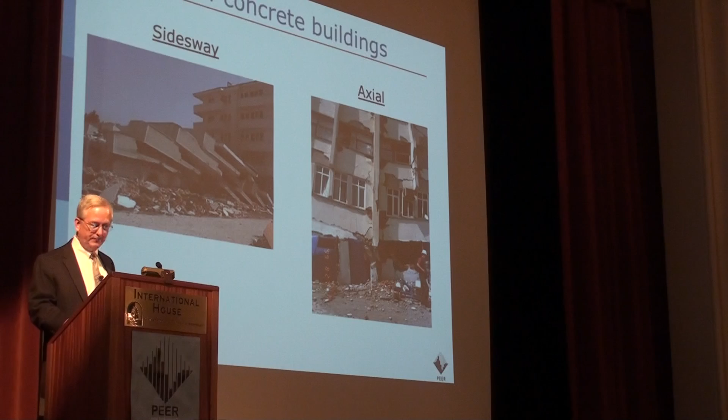We were very interested in understanding these behaviors. Twenty years ago, we didn't have a very good idea about how these things work. We're still working a little on it, but we've learned a lot in the intervening time.

We came to know that in columns of certain aspect ratios and reinforcement quantities, the failure was quite complicated, and there were interactions among many different behavior modes. For example, if flexural yielding started at one point in the testing of a column, that would trigger changes within the column section that would reduce shear strength and precipitate a shear failure at some point further along.

As the shear strength degraded, the appearance was that as strength degraded down essentially to zero, an axial failure could be triggered. This was an early observation with a few tests, and these kinds of things were pursued through the development of some shear friction models, and there's been a variety of these kinds of things developed over time.

This very simple shear friction model is wonderful in the sense that it says the axial strength is essentially directly proportional to the shear strength provided by the transverse steel. We'll see that in a moment.

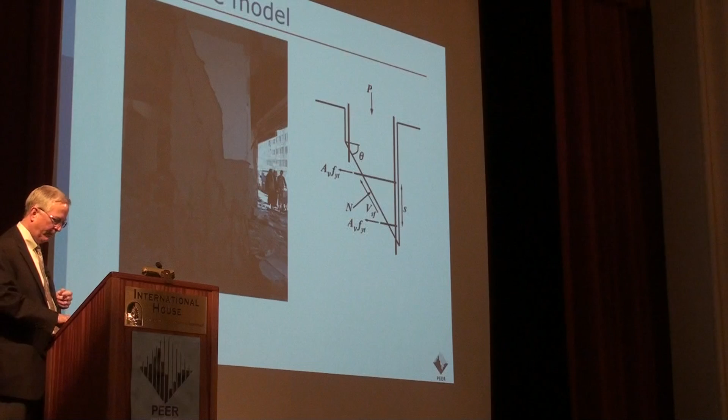This was developed based on very few tests 20 years ago, and of course we needed to do more testing. So there were many tests carried out under the auspices of Peer. Some were done at Berkeley, some at UCLA. There were eventually column tests carried out at Purdue University and the University of Minnesota as part of the NEES program. We had a very strong collaboration with researchers in Japan and Taiwan, and many other tests were carried out in those countries. But Peer really got that whole program going in those countries as well.

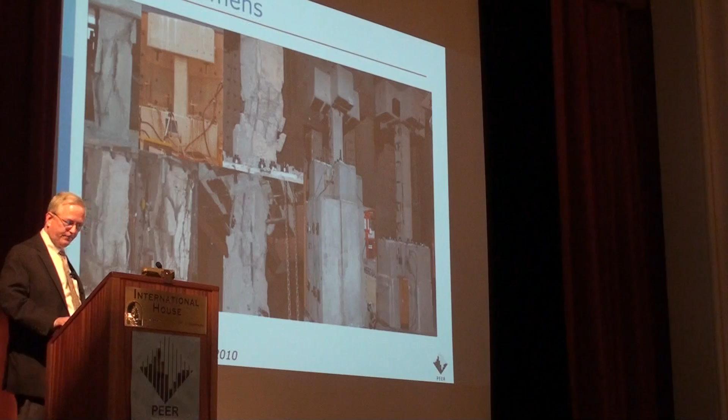We had to ask the question, how does biaxial loading affect the answer? It does, as one would expect. There's a more rapid degradation in axial force carrying capacity under bidirectional loading. These kinds of ideas have been adopted into ASCE 41 and elsewhere and are in widespread use today.

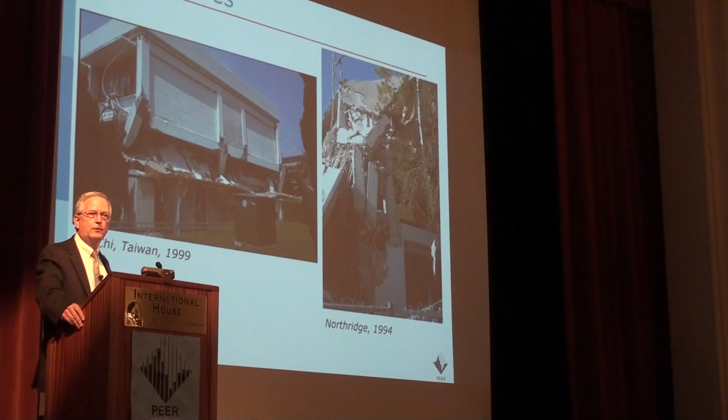We also had questions about the behavior of beam column joints. Can beam column failures trigger the failure of a building? Of course they can. If, as in the left figure, the shear strength of the joints is lost, the columns lose their moment carrying strength. You can't transfer moment through a joint that has no concrete left. So joint failure transforms a strong column frame into a weak column frame, and a weak column frame can develop a mechanism and fail, as shown on the right. There's also the question whether the failure of a joint itself can trigger axial failure without the step of having a soft story.

This was a question of great interest as we embarked on our studies within Peer as the research results developed. There were tests on beam column joints done at University of Utah—Chris Pantelides is here. Others were done at University of Washington, and then there were also some tests at Berkeley.

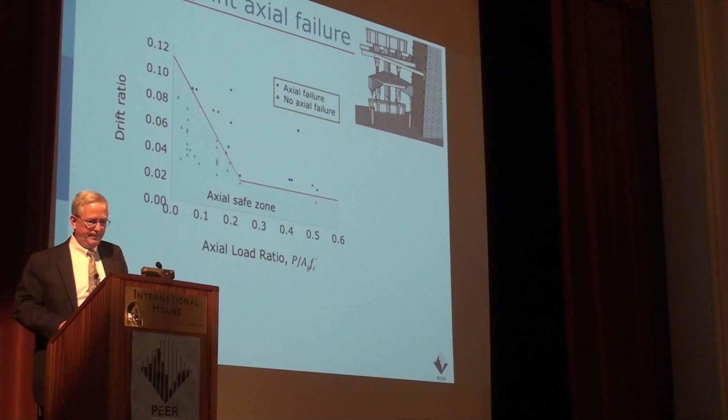Then there's an area with high axial force and high drift for which axial failure seems certainly a triggering phenomenon. Now, all of these things that were done within Peer were always done with the purpose of developing an analytical model. It's okay to test something, but only if you develop models for use in practice, only if you develop simulation capabilities that can be used to extend the results.

That was always a part of all the work that we did in the non-ductile concrete building domain. Wassim Ghannoum, who is here from UT Austin, was one of our graduate students at the time. He went on to UT Austin and developed some models. Curt Haselton, Greg Deierlein, Ken Elwood, and others developed other models for the behavior of columns.

Now, the purpose for developing these things was so that we could understand better how buildings would respond. To really develop that understanding, we also in PEER carried out a series of shaking table tests. One example was a series of two-column frames. There were a dozen of those. And then we did the other case that had a dozen columns but only one frame.

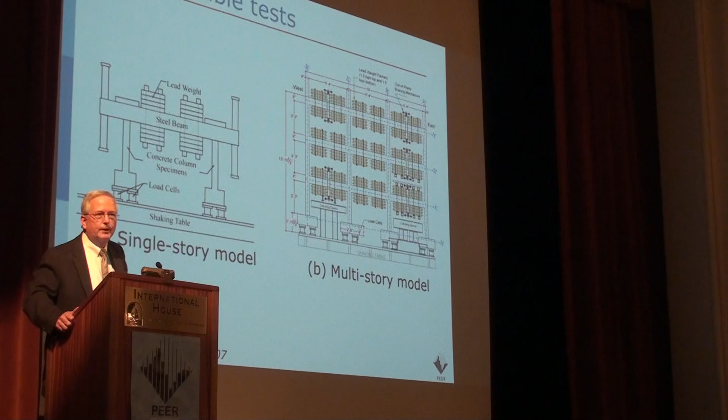To understand some of the dynamics, there were other tests run at NCRE looking at multiple columns. We're looking at beam-column joints that failed. This allowed us means for testing the analytical models that were developed. Here's an example of a test in a simple two-column frame that sustains shear and axial failure. Can we model that? Can we identify when those things occur?

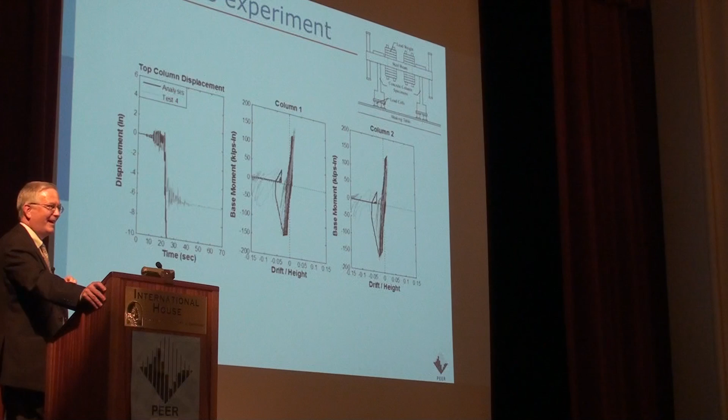And we gained confidence as we worked with these models that we were able to predict certain things, not everything. Once axial failure gets triggered, it's very hard to follow through in these very lightly reinforced cases. But having some experience enabled us to extend ideas out further.

Abby Leal, Curt Haselton were graduate students in PEER at the time, working with Greg Deierlein. One of the very interesting studies was to look at the relative safety of older concrete buildings versus, at the time, newer concrete buildings. We can see here the predominant yielding mechanisms that developed, and then in this case, the different fragility relations for newer buildings and older buildings.

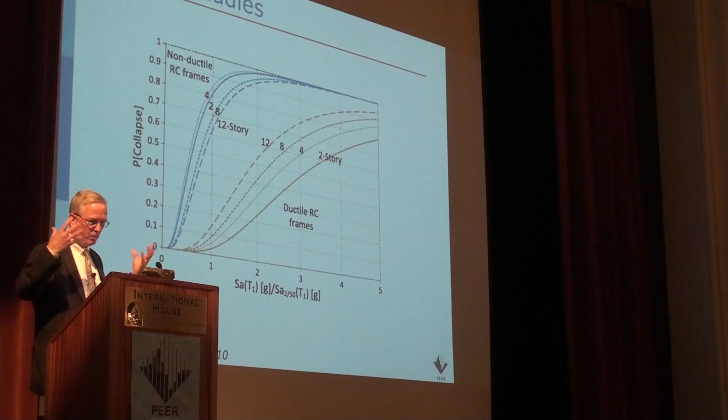A simple observation from these is that there are cases where the older buildings are something like 10, 20 times more risky than the new buildings. These studies were very important for understanding, for quantifying the risk at hand.

Additional studies have been carried out to look at how details of the frames affect that calculated risk. This is an example where on one axis we've got the relative column-to-beam strength ratio, and on the other axis is how strong the frame is relative to the elastic demand. This is a case where it's a flexure-critical column, and what's plotted here is the probability of collapse as a function of these parameters.

As we move more toward shear-critical columns, the fragility goes up and up and up. This beautiful colored balloon-like thing is not only beautiful and colorful, but it tells us something about the parameters that most indicate a risky building, and it's these kinds of things that can be used in the future.

Laura asked, what are the future needs? Some of the future needs are to take the models and do more work to understand better what the most risky combinations are, what building types are the most hazardous, and how we can develop better hazard models going forward. We heard the need for this morning.

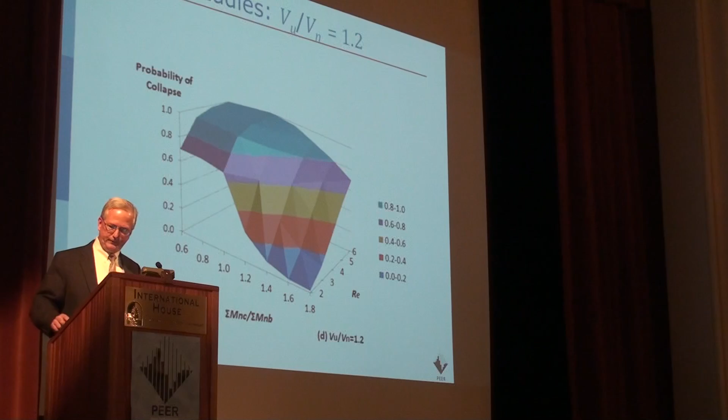In PEER, we also—somebody turned me on. Oh, turned me back on, okay. That was 50 minutes.

We also did a very interesting thing as part of a grand challenge project: we went down to Los Angeles and we counted buildings. And then we did studies of what the projected losses would be.

For better or worse, the LA Times got wind of this. It made me almost like a movie star. It made for me a most dangerous year, wondering when I would get sued. But eventually it resulted in an ordinance being passed. That and other things contributed, came together and helped develop an ordinance for LA that I feel PEER deserves some of the credit for.

And we've also, as a center and as researchers and as graduates, been involved in many different activities that are taking what we've learned in this center and expanding it outward. I think that's a really important part of making a difference with the Earthquake Center.

So then and now, this is the old Holiday Inn building. I don't think we yet could calculate exactly where the failures occur, but it doesn't matter because the new one is retrofitted. And we have some new challenges to deal with there.

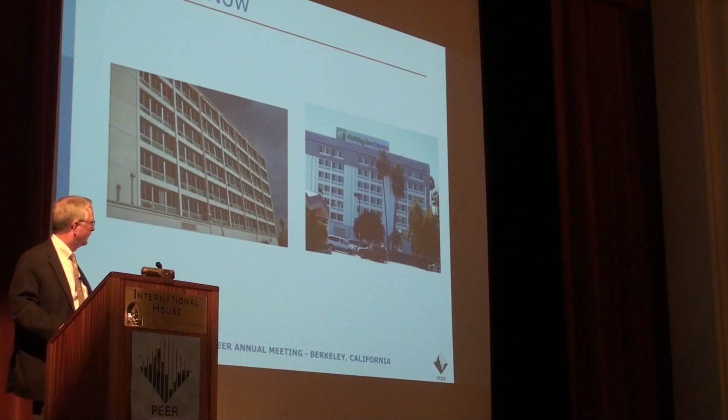Those of you who came into this building, I assume read the signage on the way in. This building is located in a seismically active area—the fault is like 20 yards away from here. In the event of an earthquake, serious injury or property damage may occur.

So this is a concrete building, a type that we haven't studied so much yet, and I think there's plenty of room for continued research in this broader area of reinforced concrete construction. So we can go to places like LA and San Francisco and continue to make a difference in seismic safety for these kinds of buildings. Thank you.

Are there any questions? That looks like no. Oh, okay.

So it occurs to me as you're speaking, do you think that we will get to the point where we can model Van Nuys Holiday Inn its old state before all of those buildings get torn down and rebuilt? So yeah, great question. Will we get to that state? I think there's enough variability in the ground motion, how the ground motion gets into a building, and enough variability in the innards of every building out there that we may never be able to predict exactly what happened.

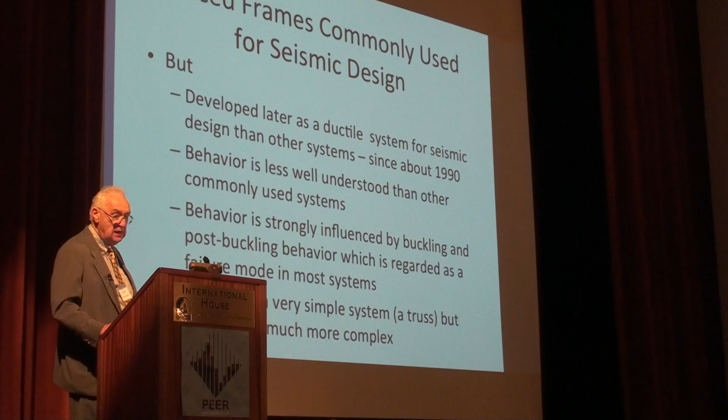Unfortunately, many structural engineers don't really understand what they're expecting the structural system to do seismically, and this has caused real problems. As a consequence, there has been fairly significant research on brace frames in the last 10 to 15 years that I think hopefully is trying to help better understand the performance of brace frames, improve the seismic design of brace frames, to better understand the performance of brace frames we built before any consideration of seismic design, and to do a retrofit of this. That's pretty much what I'm going to try to talk about today.

The work I'm going to focus on today has primarily been 3 National Science Foundation projects that have been performed since, I guess, 2003, continuing on to today. The research on these projects has been done at 4 major institutions.

In the upper left, you see our lab at the University of Washington in Seattle, and we've tested more than 50 single-story, single-bay brace frames in our laboratory, with different braces and a wide range of different connections, to evaluate their seismic performance.

On the upper right, you'll see the MAST laboratory in Minnesota. In this laboratory, 2-story brace frames were tested, and these were 3-dimensional type frames, tested under bidirectional type loading at that university. These simulated, more accurately, the boundary conditions for brace frames.

On the bottom left, you will see a frame at the NCREE laboratory in Taiwan. This laboratory has tested 8 multi-story, 2- or 3-story brace frames with concrete slabs under a range of different seismic applications with different types of braces. And on the bottom right, you see some 2-story frames that were tested here at the laboratory at Berkeley.

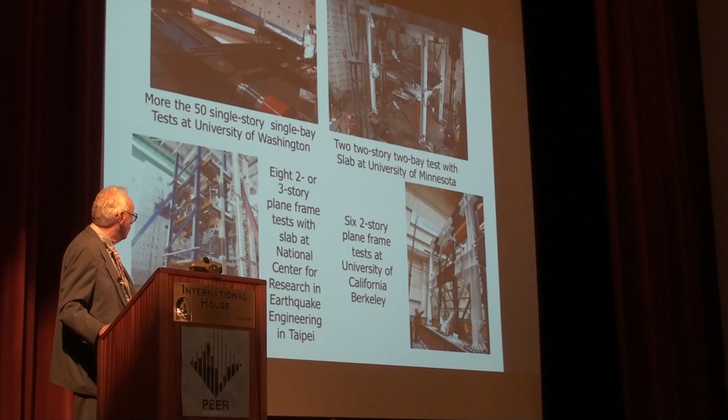There were several other research projects on brace frames in the last 12 years, including some research done at the University of Buffalo, Georgia Tech University, and the Miki Test Laboratory in Japan. My focus is going to be the results of these works.

Now, I've made presentations of these. We made one presentation a few years ago that was over 4 hours. I don't think you want to sit here for 4 hours today. I'm told you could have 15 minutes.

So rather than going through a lot of talk about what the researchers are doing, I'm going to try to focus on key results that I think are significant, and things that I think are significant achievements from this particular work.

First, I think the key thing we really need to think about is that when people think in terms of brace frames and structural design, they think about designing member by member. If you think about designing a brace frame member by member, you're probably not going to do a very good job. With brace frames, you've got to think much more about the system, because the member acts with the rest of the structure.

You have to think about the brace, how its connection relates to the rest of the framing members. Because in brace frames, buckling is our major consideration, but there's a lot of inelastic deformation in the gusset plate connections that connect the brace to the regular framing, and then the beam columns themselves.

Secondly, I think you have to recognize that inelastic deformation of the brace is a primary inelastic behavior. Buckling is not the end of the world. Buckling is a yield mechanism. It's a way to deform the structure. It dissipates energy. Fracture of the brace is a thing that's ultimately going to occur, but brace fracture does not imply structural fracture. These are two perceptions people have about brace frames that tend to lead them astray in their thinking.

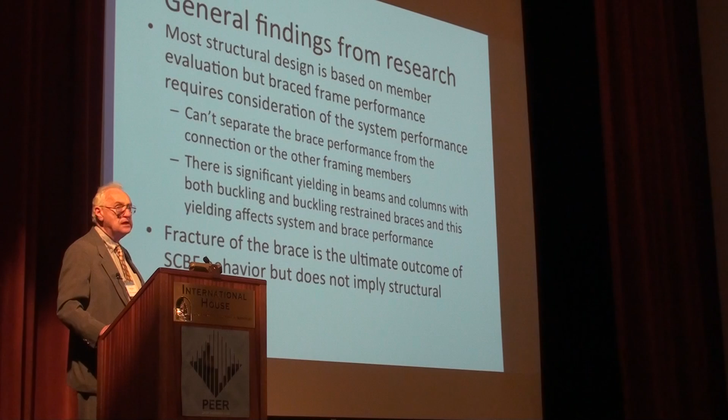So in doing this, we've come up with what we think are some recommendations for new construction, which are quite useful and quite valuable. One decision is that currently, when you design the connections for the expected capacity of the brace, and then when you design the welds joining the gusset plate to the brace, most people use the uniform force method for that expected force.

What I'd like to show you is that this is not going to give you good performance. It's going to result in very, very limited ductility, and it's very likely to end up with weld fractures such as you see right here.

If we're going to be designing brace frame gusset plates to get good inelastic performance, we've got to design the welds joining the gusset plates to the beam and the column to be strong enough to develop the full inelastic deformation capacity of the gusset plate. Because the gusset plate will yield, it will go through inelastic deformation—I don't care how big you make it, that deformation is going to occur. So we've got to design the welds to be big enough to develop that particular gusset plate.

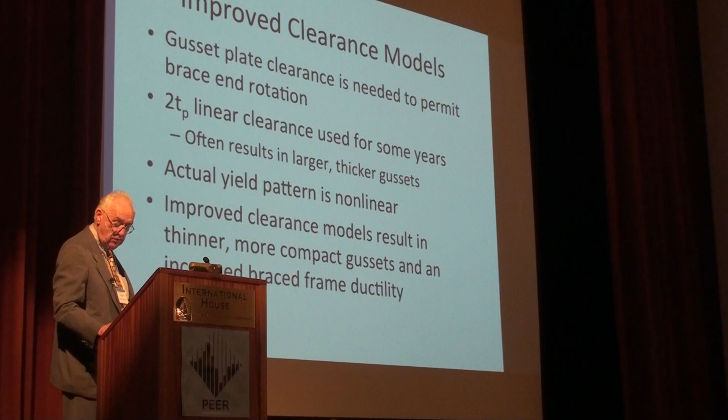Another thing we've developed is the clearance models. In buckling there's a great deal of out-of-plane deformation of the brace, which causes end rotation on the gusset plate, and you've got to consider that. Historically, we've used the 2T sub P linear clearance model. There's nothing wrong with this model, except it does tend to lead to fairly large gusset plates, and these large gusset plates tend to be controlled by buckling because you have to bring the brace back quite severely. So we've proposed some better models that we think are more reflective of the way they actually behave.

For corner gusset plates, we propose an elliptical clearance model as shown on the left, because this reflects the pattern of yielding you typically see in these gusset plates. For mid-span gussets, we propose a 6T sub P linear clearance at that location. We proposed these because they allow you to bring the brace back further, meaning buckling no longer controls the design of the gusset plate. This means you're using a thinner, more deformable gusset plate, which means you can use smaller welds, and it actually increases the inelastic deformation capacity of the system.

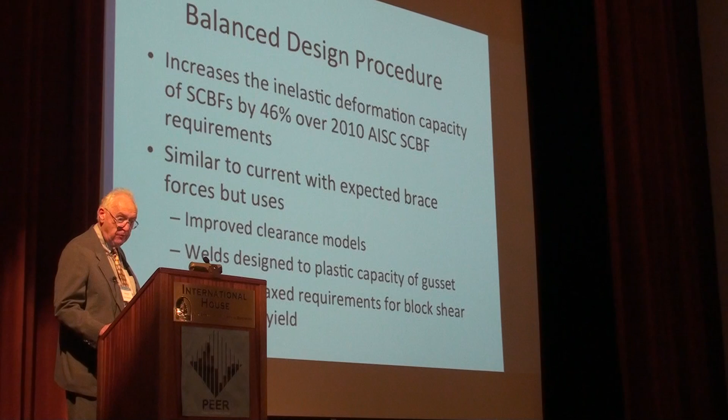We also propose a balanced design procedure for these gusset plates. This is a capacity-based design procedure in much the same way as we normally use. With this procedure, however, we like to use increased yielding in the gusset plate and a relaxed block shear criteria. The reason is, if you have a little bit more yielding in the gusset plate, you get a lot less damage to the beams, columns, and other structural members. We think this improves performance—it actually increases the inelastic deformation capacity of the brace, an average of 46%.

So what we're really proposing today is a sequence of behaviors. We expect the first thing to occur is brace yielding, brace buckling, and brace yielding—buckling typically occurs first. Shortly after that, we expect some yielding in the gusset plate, and ultimately some yielding in the beam or the column. But ultimately, we expect the outcome is going to be brace fracture. Brace fracture does not mean collapse—the frame still has significant inelastic deformation capacity after this.

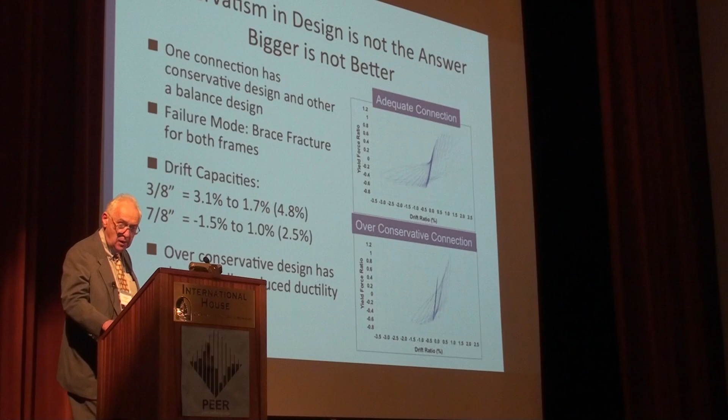More recently, we've been doing research on older pre-1990 brace frames. To start, we looked at an extensive number of design drawings of older buildings, mainly from California, but also from Washington, Oregon, and some other parts of the United States.

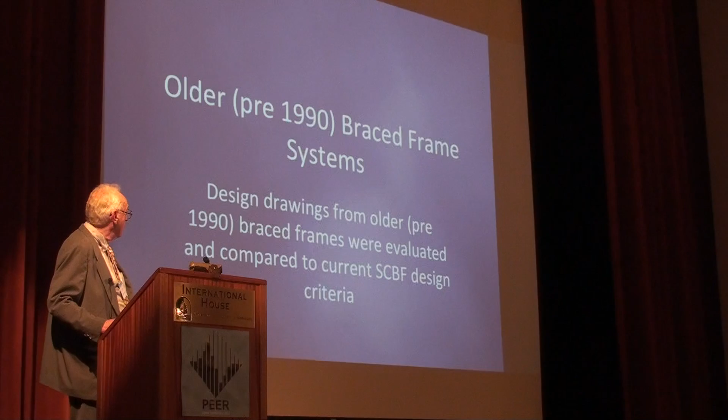In doing this, we see a lot of deficiencies. We have figures of what these look like. I'm not going to focus on all of these—I picked out several deficiencies I'd like to talk about.

One deficiency is that almost all of those older brace frames are chevrons. We don't use chevrons hardly at all today because of the strength requirements in the beams.

We find that many of those have understrength gussets with no end rotation clearance. We find that the welds are deficient—deficient because they are not demand-critical welds, and because the welds themselves are undersized. I think you'll find they commonly use HSS braces, and these HSS braces are very slender compared to today's requirements.

They have a wide range of bolted and welded connections. Many of these we have tested in our research. What I'd like to say about these older brace frames is some of these systems aren't that bad—some are almost as good as what we'll be designing today, maybe better. Some of them are very, very bad, with very serious problems.

Here I think you'll see one that is actually pretty good—it's not bad at all. On the left you'll see an SCBF bolted connection designed by today's criteria. On the right you'll see an older connection, and you'll see that the older connection gets as much, if not more, ductility than we get out of our new system.

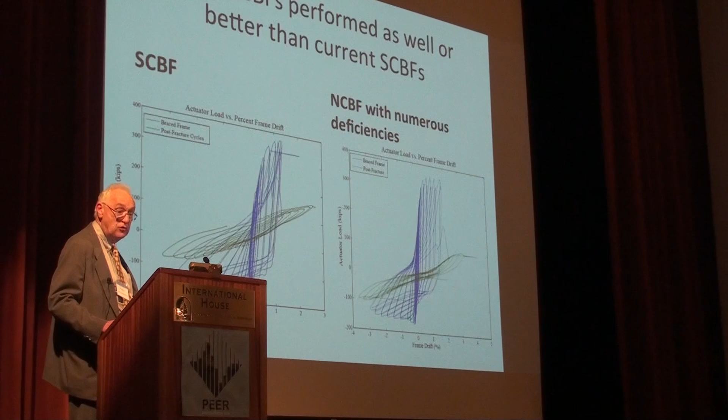Why is this? Well, because the older system had deficient gusset plates, so it was yielding in the gusset plates and getting bolt hole elongation. That bolt hole elongation really contributed a lot of inelastic deformation capacity to the system. Today, we design our bolts very, very conservatively, and you don't get this—so in effect, we were fracturing our brace much earlier in these systems.

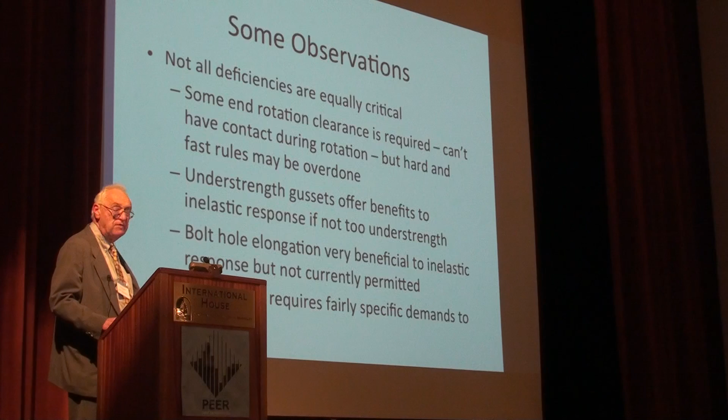As I pointed out, not all deficiencies are equally critical—some seem to have bigger consequences than others. End rotation doesn't seem to be as big a problem. Understrength gusset plates don't seem to be much of a problem either. Bolt hole elongation, which occurs with these weaker gussets, is often a good thing. Net section, we find, is not a real problem in many cases—it requires a very, very special set of conditions to occur.

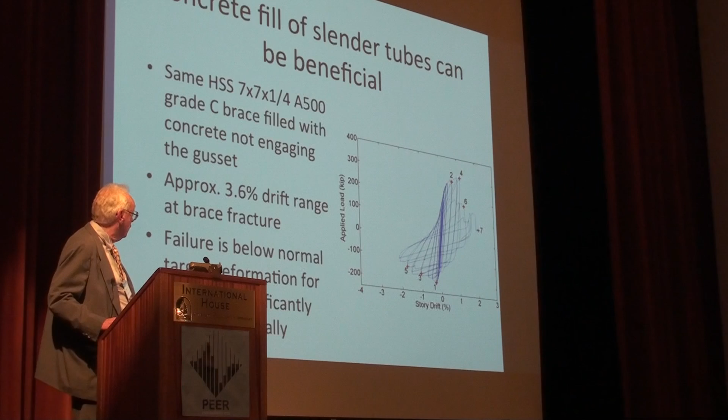We looked at methods for possibly fixing that. One method is to fill the tube up with concrete. We did this, and in this test, I think you'll find that it's done very, very well. However, it's not a perfect situation.

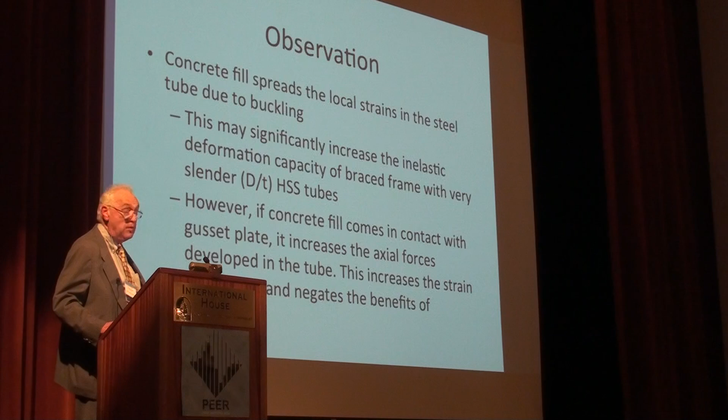Since the concrete fill engaged the connection, it made the brace stronger, attracted larger forces and larger strains, causing the brace to fail more quickly. So we think this concrete-filled tube concept is good for possibly improving the performance of these slender braces, but you really have to keep the concrete well clear of the connection.

Weld fracture is another relatively serious problem. It didn't seem to be quite as serious as we expected, largely because the gusset plates were almost invariably also weak and didn't protect them.

We tried a potential economical retrofit using weld overlays. Weld overlays were tried in the SAC Steel project with not very good success, but we found that weld overlays have actually been fairly beneficial with these gusset plates. We designed the weld overlays with demand-critical welds, and sized them to develop the plastic capacity of the gusset plate.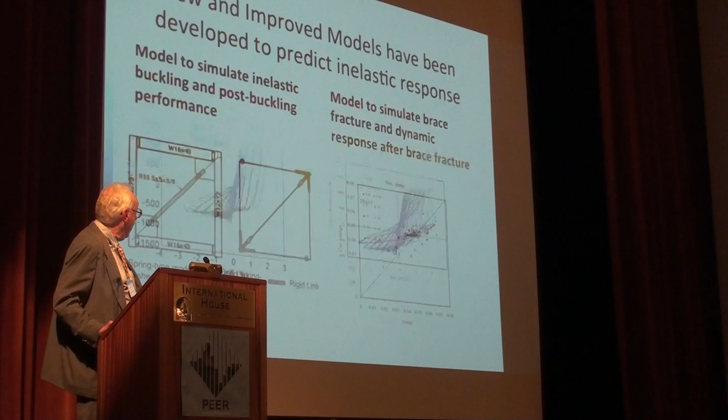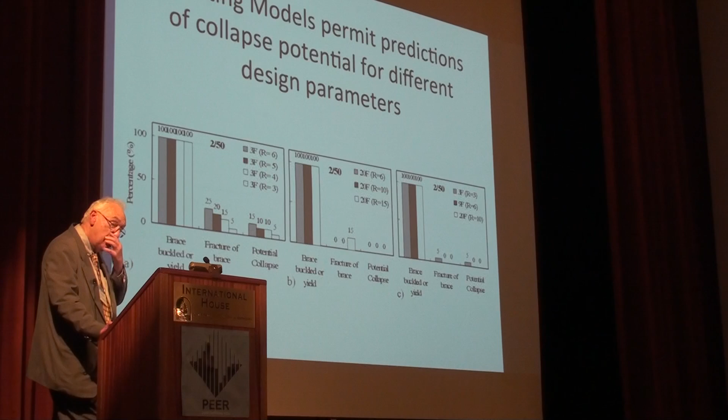We've also done quite a lot of work developing nonlinear models to predict performance, focusing on the connection and on brace fracture. We compared all of these tests with experimental results. Here's a comparison showing the stiffness and the prediction of brace fracture. Using this information, we estimate what we expect the performance of brace frames to be. Here is a comparison of expected behaviors of a brace subject to a 2 and 50% acceleration record, for a 3-story building on the left, a 9-story building in the middle, and a 20-story building on the right. Using information of this type, we think we can make further improvements in brace frame design.

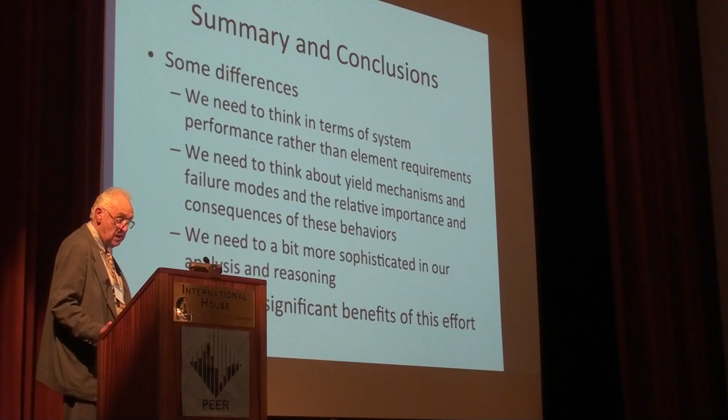So I think there have been some significant developments in brace frame research. I think there are a lot of things we've learned. I think there are ways we can continue to improve the performance. I think there's a considerable way we still have to go. In any case, I think we need to think in terms of system performance, in terms of yield mechanism and failure modes, and we need to be a bit more sophisticated in our thinking about brace frames.

I've talked too long, but this is a photograph of the University of Washington campus, which I always use to tell me it's time to shut up.

Which is very much member related, but I don't think it requires all that much thinking. It's like writing a program where you have do statements and if statements, and you need to think about, well, if I have this, I need to condition my response on two or three things rather than just a single variable. But I think we have to do a better job, or we're not going to get the full benefit of what we can get out of this.

I don't think there's a conflict with what we're saying and capacity-based design. I think it's just a modification of the way you apply capacity-based design. Right now capacity-based design looks at things in a certain way. Our recommendations don't really change that; we're looking at the same basic capacity-based conditions, we just like to apply them differently and think about them differently. I think capacity-based design tends to make you want to be very conservative in everything else, but think about that - you can easily think of cases where it gets taken to extremes. The idea is you pick your mechanism in advance and design everything else to stay elastic to develop that one mechanism. But why does everything else need to be elastic? What seems right to me is you design everything else to be strong enough so it doesn't have problems. Why does it have to be elastic? You just don't want it to have problems, and that's very much what we're trying to do with that type of behavior.

I think you can readily see that, for example, in this building, if you said okay, I want the columns to have no shear problems - which I don't know if they do or not - you could put a ton of shear reinforcement, three or four times as much as you need. Does that help you? It might actually make the situation worse because it may attract forces and cause things you don't expect. So we think you should design it to be good enough, strong enough, but no more.

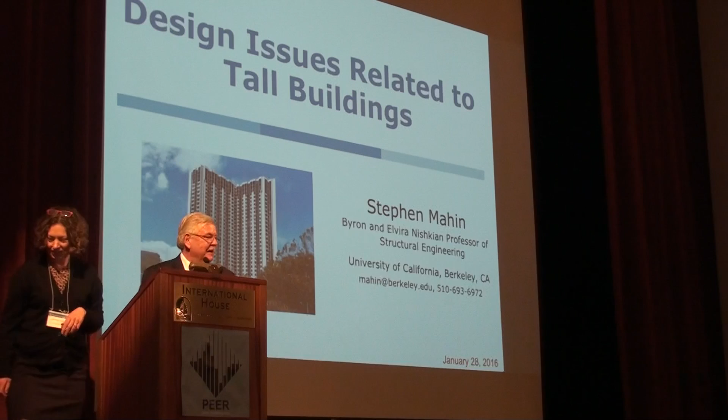Well, anyway, it's good to see you again, and we have a little bit more audience than we did this morning, so that's great to see everyone.

What I thought I'd do today was talk a little bit about tall buildings. I'm not going to talk so much about the research or research results, but this was intended to help us focus on some of the philosophical issues with regard to resilience and the seismic performance we'd like to have in structures, to get some discussions going later in the meeting.

This is related to tall buildings. It's a topic I've been working on for most of my career in one form or another, and I've come back to it in the last 4 or 5 years in some significance.

Part of that reason is that this is a building not in Berkeley, but on the border of Berkeley. I think it was the tallest reinforced concrete moment frame building in the United States in 1984, and I live right there—which suggests that after the next earthquake there may be something like 1,200 angry lawyers and one really upset structural engineering professor. In any event, that was the tallest building, and now in California there are taller buildings.

But if you look around the world, one question is: what constitutes a tall building? You don't have to go very far—people from Shanghai here will recognize this building. So my tall building, which is 30 stories, is 1/3 the size of something that would be a relatively mid-level tall building in much of the rest of the world. So 'tall' is a relative term, and most likely we will get up to these heights at some point. What can we learn from the lower buildings to apply to super tall buildings as well?

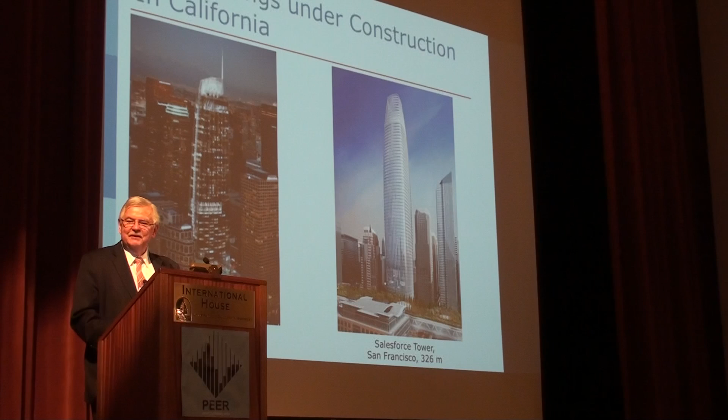When I was a student, everyone said you should have a dual system with a backup system, and some redundancy. But a lot of these systems now have very little redundancy—there's a single core in the middle, and if there's anything else, it may be an outrigger system. We've worked our way into thinking that's a good thing. It wasn't a good thing 30, 20, or 15 years ago, but now it's a good thing. So I agree with everybody, it's a good thing. But the next earthquake will show whether we're right or wrong.

These buildings are also becoming taller, but not necessarily wider. If you look at the building on the left, the Wilshire Grand in Los Angeles, it's very narrow. You can see the shading of the shear wall, and it has a series of outriggers at 3 different levels. It's so narrow that it was very hard to keep it from tipping over, so at the bottom there's a little foot that sticks out—the shear wall goes down and turns left, just to keep the building able to develop the moments that go into the foundation region. So these buildings are getting taller and taller, but they're relatively regular.

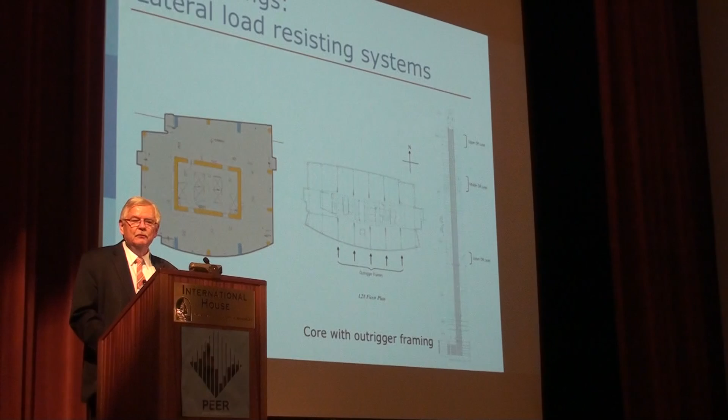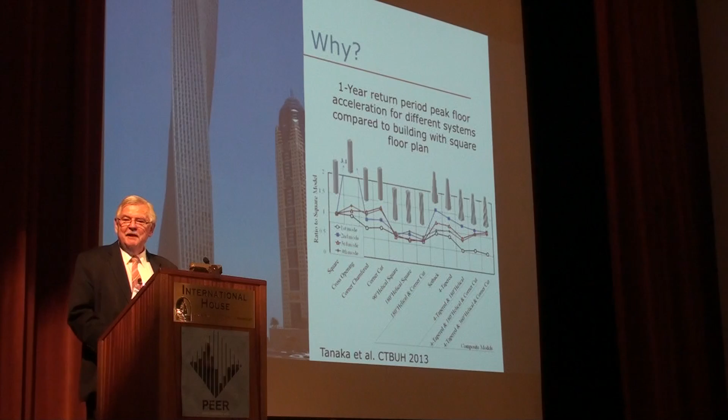Looking at this very carefully, you would find that a round structure that twists somehow is going to have about the best behavior, and that's why you end up with this building on the right-hand side here. The architects look at architectural magazines. Somebody in San Francisco is going to look and see these buildings. One of them is designed by an architectural firm in San Francisco. And they will just start building these and assume that engineers will extrapolate one more time and build something that performs well in an earthquake. So one of the things to see in anticipation, not necessarily wait for the next earthquake, is whether or not we believe we can extrapolate to these kinds of situations.

Now, architects do some really strange things that aren't recommended by engineers. This is a building currently under design in Los Angeles, and there are no columns whatsoever that run vertically, no columns on the inside of the building at all. So this is just an exoskeleton with this twisted stuff you see on the outside. Moreover, the shear wall that holds the building up is this white thing on the outside of the building, about 50 feet away from the center of the structure. Architects are architects, and they just design it. That's what you end up with.

And now an engineer is trying to use ASCE 41 to design this. None of those connections have ever been tested. None of them satisfy any building code requirement, and they're trying now to seismically isolate it so they can say it's elastic, therefore it doesn't have to be ductile or tested whatsoever.

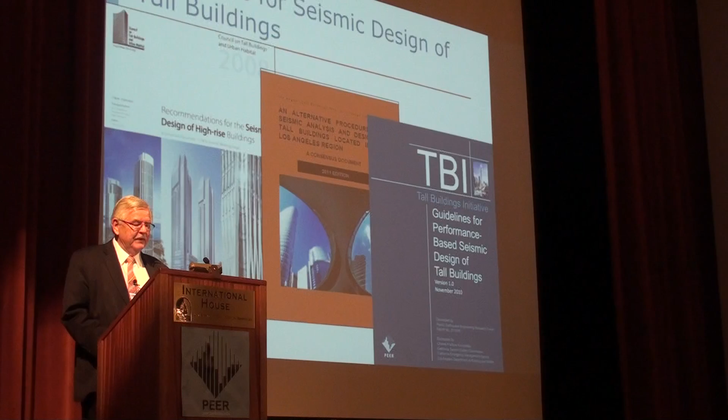In doing that, Jack and the group that had developed the tall building guidelines did an excellent job. They're in the process of starting to revise or review and then revise as necessary the guidelines now for peer. But out of that, you end up with a Vision 2000 peer methodology, ASCE 41 chart here that suggests you can build a matrix that relates to the seismic performance.

Severity or rarity of the earthquake motion would be done by basically looking at the performance you would expect for a very rare event or moderate event, and for a very frequently occurring event, and assign those. So the design process outlined in the Tall Building Initiative is you basically design the building as if it were code compliant, consider what exceptions there might be, ignore some of them, and take account of the other ones as appropriate.

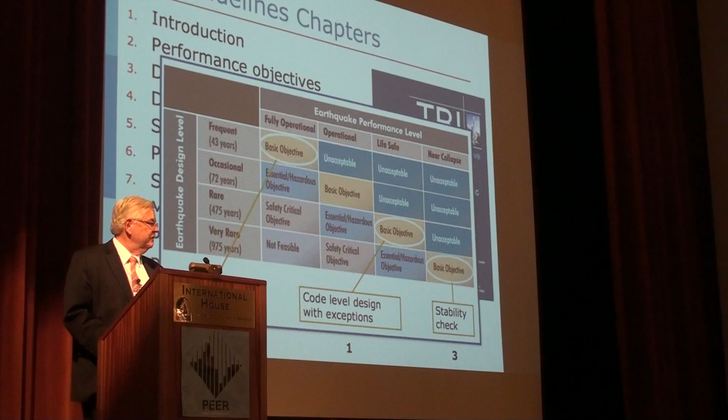Then you would do an elastic analysis for a service level event to make sure it doesn't yield too early and cause damage under frequent events, and then do a nonlinear analysis of the structure for a larger, rarer event, making sure the structure satisfies the requirements of the building code for the code level performance-based earthquake engineering.

One of the unknown things in this graph is basically the type of building that you would have. This is sort of a basic objective for the yellow, but there's hazardous buildings, essential buildings, and safety critical structures. But one of the philosophical questions is: is a tall building just an ordinary building?

I think Peer had a workshop and agreed at that point that these buildings were in risk category 2. But if you look at ASCE 7, it says for risk category 3 that this is a building with potential to cause substantial economic impact or mass disruption of day-to-day civilian life in the event of a failure. So the question is, if you have a building with 5,000 people in it, is that going to be a massive disruption of ordinary day-to-day life, especially when the people who live in those types of structures are all lawyers or IT guys who have 3 or 4 lawyers working for them, and there's nothing good that can come from that.

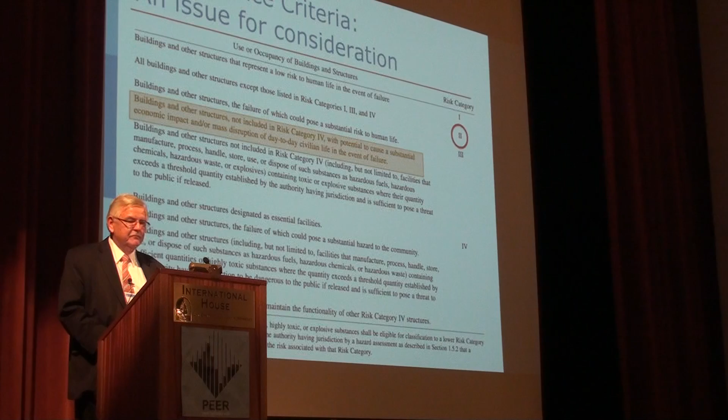One of the things that comes up is that CALBO, the California Building Officials Organization, has put out an interim guideline that suggests that if you have a building that is red tagged, any building within that height, or in some cases 1.5 times the height of the building, is also automatically red tagged. You saw that in New Zealand, and you saw that in Napa, where buildings that had no damage whatsoever were close to another building and they were red tagged.

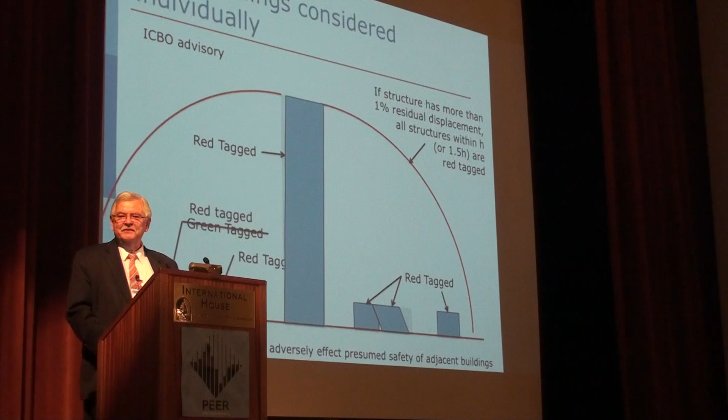So if I have a tall building, then anything within 330 meters of the base of the building is also red tagged, which gives you the notion that if you have some tall building like this, you're going to red tag a fair amount of real estate. If you have a city that has 5 of these in it, you're going to wipe out, or red tag, most of the city in some cases.

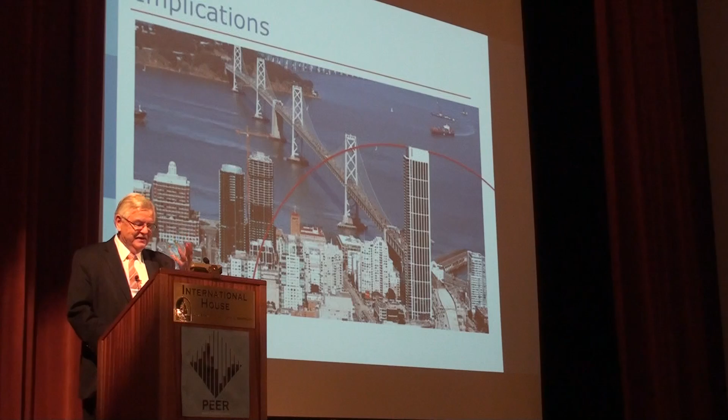So the question is whether that's rational or not. I think Professor Mosalam is looking at the potential for collapse and when things actually go over like a big sequoia tree or come straight down, like Jack was saying, as a subject of potential research.

The other thing is that if you look at the building codes today, it has a nice chapter in ASCE 7, Chapter 13, for non-structural elements. But if you look at it, it says that you would design a structure for the non-structural elements for the case where you have the design level earthquake. There's no design consideration whatsoever in the code for the MCE level event. So if you do have an MCE level event, this is perfectly acceptable behavior, I would believe, by my reading of the code.

For the behavior of the structure. So there's a question: if you have a tall building like this, which under the design level event might actually structurally behave quite well, and you have this kind of behavior, we also potentially have to look at that. So I think there's an issue of what we want these structures to do, and then how do we get them to do it.

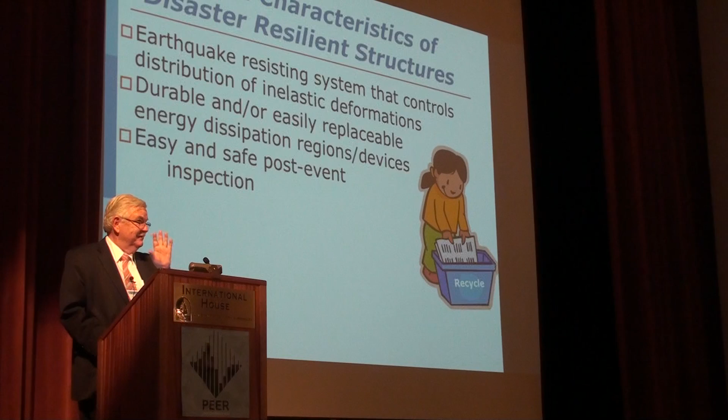In that regard, I think there's an opportunity for engineers and researchers to do more work on figuring out how to build resilient structures. This would basically be the needed capacity design: locate the damage where you would like it to be, make everything else behave well, make the plastic hinges durable and easy to repair, make the damage easy to find and quick to repair, but also come up with structural systems that will reduce the relative displacements of the structure, the accelerations of the structure, and if possible have some self-centering mechanism that would reduce permanent displacements.

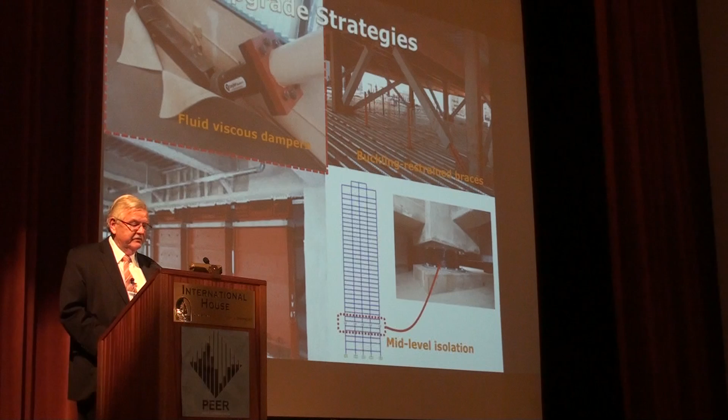And so we've all seen work that's looking at adding viscous dampers and energy dissipating devices of various sorts, or other methods, and using seismic isolation. For tall buildings, people have used outriggers, outriggers with dampers in them, and various combinations of very clever things involving outriggers.

But one of the things is, if I live in my apartment, and assuming it had a shear wall in it — it does not — and I came home at night and walked up to the front door, there would be an elevator, and that elevator would be the shear wall, and I would note that the shear wall just had lots of cracks in it that I might be able to put my hand through. So I'm not going to go into that building. It's going to be red tagged. And so the upper part of the building, outside the plastic hinge region, may just be perfect.

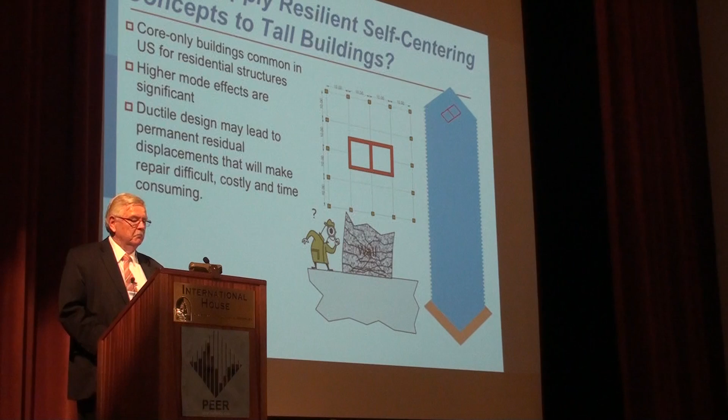So we're building the entrance to a building in the plastic hinge region, which I think is just perfect. But we'll see after the next earthquake.

So the question is, can we avoid some of these kinds of problems? One way is to have some type of recentering system. The shear wall doesn't have to be continuous monolithic construction. You can have something sit on the ground, armor it in some fashion, post-tension it if you need to get this recentering property operating.

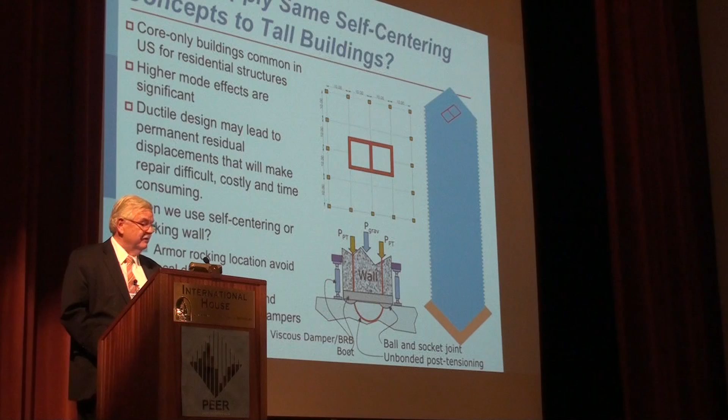You can also put in viscous dampers or buckling restrained braces for reinforcement. And if this worked perfectly, which nobody I know has tested, one could see whether you could have a plastic hinge that is mechanical, but pretty much indistinguishable after an earthquake happens. It just opens up and closes like that.

And then lastly, I'm doing a lot of work myself on seismic isolation of tall buildings. This isn't particularly tall, but the purpose of this slide is that blue line in here.

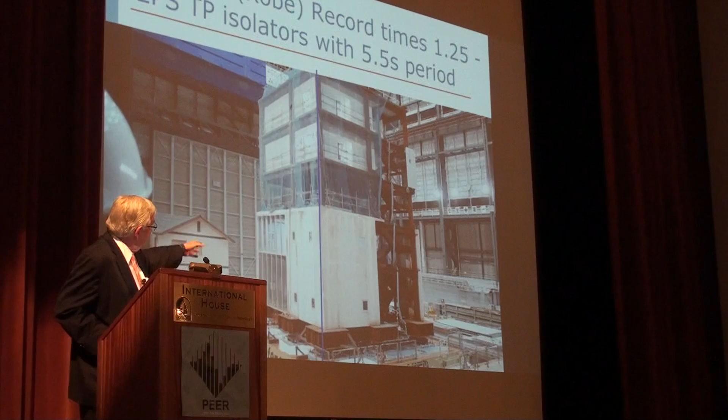This is a test that Keri Ryan from Reno and I did a few years ago. Basically, the table's moving back and forth about a meter, and the building relative to the blue line moves about 8 inches at a period of maybe 6 seconds or so. So in terms of horizontal motion, it's just like being in a little boat moving back and forth, whereas if you stood on the ground, it's shaking pretty violently.

So if you look at the animation of the structural analysis, it looks like the building is going back and forth because the ground's not moving in most animations you would do, but really the ground is moving back and forth and the building is staying stationary. So as far as the occupants go, I think the isolation might be a little bit better.

I left out a slide—I was going to show some examples of the analyses we've done, but basically the studies show that, as one might expect, isolation systems could reduce displacement demands and drift demands in the structure to perhaps a third or less of what they'd be for a fixed base case, reduce accelerations by a factor of 4 or 5 in some cases, and the bearing demands might be fairly large, a meter, meter and a half, 2 meters, depending on the ground motion.

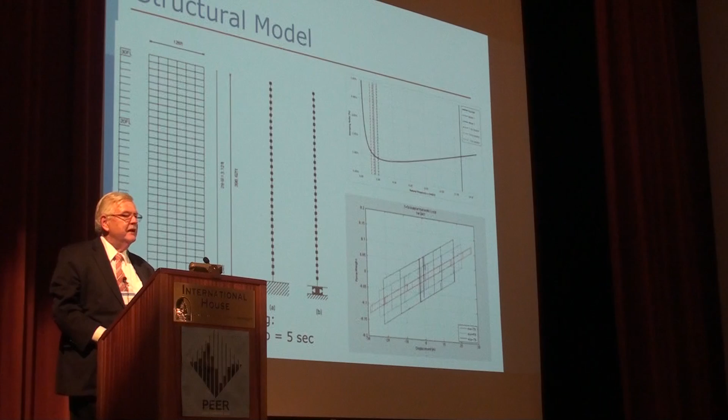So anyway, in conclusion, I think tall buildings become a way of focusing on some really expensive and high-value piece of real estate that makes some of the studies we do for performance-based design and resilience studies economically feasible to do. We'll do hundreds of trial analyses of floor systems to minimize the cost of a tall building.

So performance-based design is not something particularly unusual, and most tall buildings are being designed by performance-based methods anyway. But if we do that, I think there's an importance of bringing into consideration the business interruption losses that might be associated with this, and the large consequences of residual displacements that might dominate the economic losses, both in terms of the individual building and adjacent buildings.

There's an opportunity to look at different kinds of structural systems that may be new, that would have less damage, and to utilize new and innovative concepts and devices, and to take advantage of high-performance computing.

And then when we get into tall buildings, this gives us the chance to do multi-hazard analysis. You get the tall building, you have to worry about wind almost no matter where you are. So we have to start looking at the interaction between wind and earthquake-related issues in terms of human comfort for a one-year windstorm, and non-structural damage for wind and for earthquake, which may be controlled by different things.

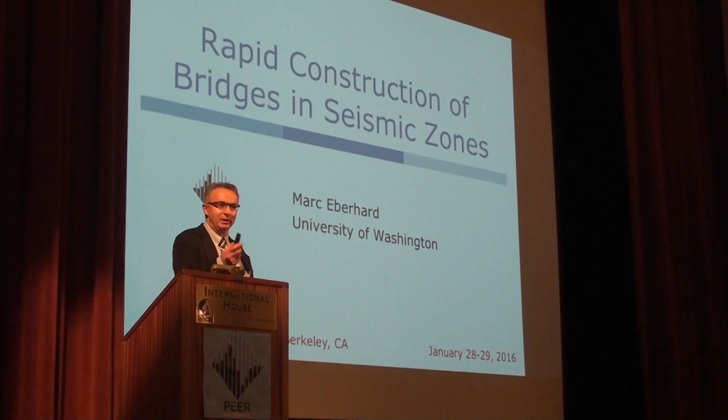Well, good afternoon, and thank you for staying here till the end of the day. It's always a privilege to speak to all of you. It's also a privilege to follow Steve Mahin. But Steve, I need to tell you something - you freaked me out, because I live in Seattle where we have tall buildings and new ones going up, and we have long period motions coming in the future that last for a very long time. And if you tell me things are not good in San Francisco, then I'm even more worried about Seattle. But anyway, so I can now worry about that in addition to other things in life. So thank you.

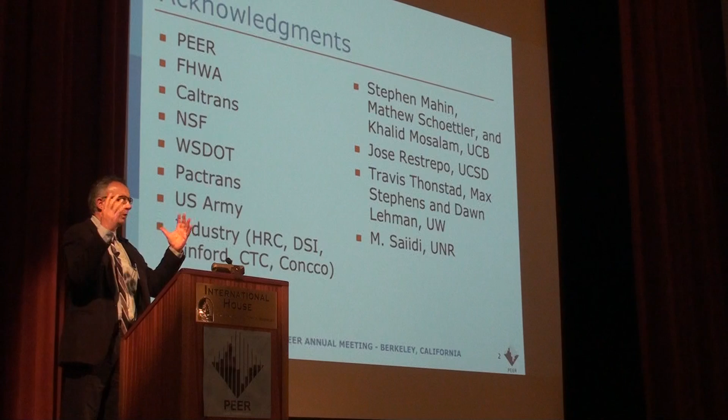By acknowledging the many contributors to this presentation - I can go through a lot of projects and talk about rapid construction. About 10 years ago, there was almost no work done on rapid construction in seismic zones. Over the last 5 years or so, there's tons of work going on. I'm only going to cover some highlights, and I apologize if I missed your project. I certainly can't go through and talk about exactly who funded what, because there's so much collaboration going on among the agencies, among the researchers, that who knows what idea came up. So I'm going to thank everyone way in the beginning for all the great work. On the right-hand side, I just have a list of people who submitted slides to me. So thank you, thank you, thank you. And for those of you who I missed, I apologize.

Okay, so the first question, of course, is why you want to accelerate bridge construction in the first place. The main thing people think about is a traffic jam. I'm not suggesting that's due to bridge construction, but certainly bridge construction hurts your traffic congestion, and it happens throughout the entire construction process. But I just want to point out there are other reasons you might want to accelerate construction. If you're in an environmentally sensitive area, you're going across a river, you have salmon runs in Seattle, trout runs in the mountains. Also, you have a very short window for construction - if you look at Alaska, or in the mountains, you have a short construction season. So a lot of the reasons you want to get in there and get out as fast as possible. Really, the speed of construction shows up in many different ways.

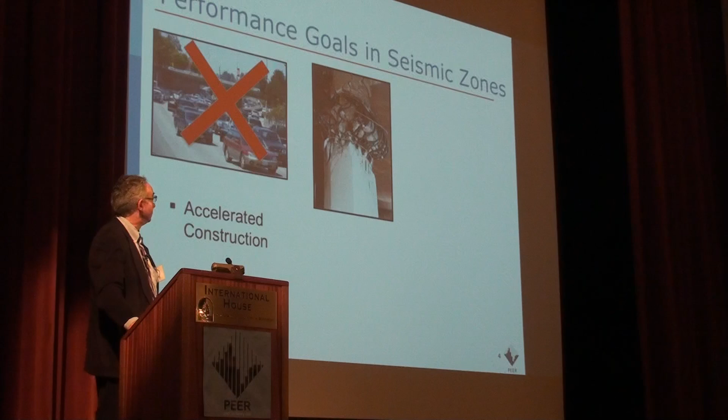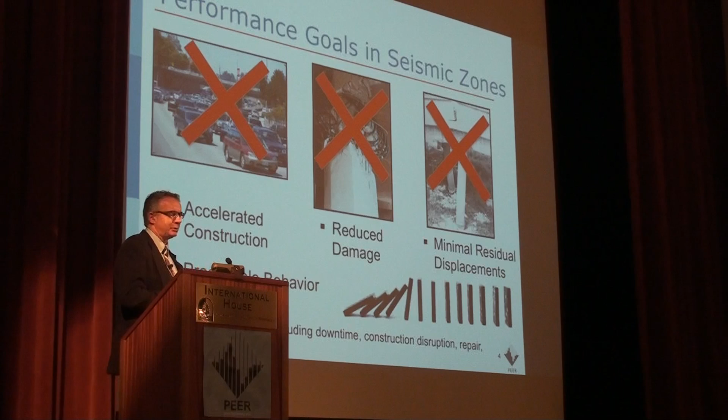Okay, so first of all, we certainly want to accelerate construction, but the good news is that if we're going to develop new systems, we can have some other performance goals beyond just going fast. Certainly we like to limit damage, we like to have our bridge go back to the original place where it started. If we're going to start doing some kind of performance-based evaluation and design, we should be able to predict how it's going to behave. And finally, nothing is free - you have to work with economics. My sense is the only way economics work for these new systems is if one considers economics in a broadly construed sense. It's not just the cost of materials and labor at the beginning, it's the cost of maintenance, the cost of construction disruption, the cost of disruption after an earthquake. And it becomes that cost issue and the benefit issue pretty sticky with it.

Okay, so the main contribution that PEER's been doing in the rapid construction area has been through the bridge column program, focusing on the idea of dissipating energy at the ends of columns. And as in most structures, the issues are usually mainly about the connections.

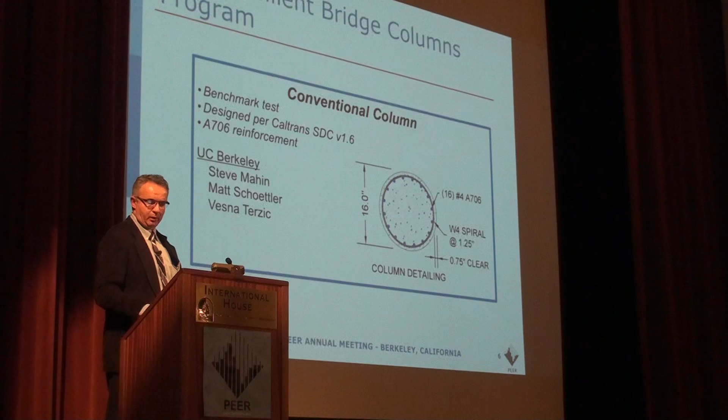So we developed a series of new systems with 4 different teams working in parallel, and one reference column to compare these new systems against. This is led by Steve, Matt, and Vesna at Berkeley. They have a standard column using Caltrans criteria that's flexurally dominant for comparison.

There are 4 systems. The one we did at University of Washington had a hinge that was hollow shell at the bottom, with a hybrid fiber-reinforced concrete developed by Claudia Ostertag and her colleagues. It tends to be more ductile at the base, and has pre-tensioning to get the column back in place. The idea is to use pre-tensioning rather than post-tensioning because pre-tensioning occurs in a lab or factory, whereas post-tensioning slows down the construction process.

There was a column that had HYFRC, a solid block at the bottom, designed at Berkeley by Marios Panagiotou, and again Caltrans was involved in that. In that case, they had post-tensioning in the column to move it back into place. They also wanted to make sure the interface occurred right at the base, where you'd have the opening and closing cracks, so there were headed bars which essentially would pound on each other as we went back and forth.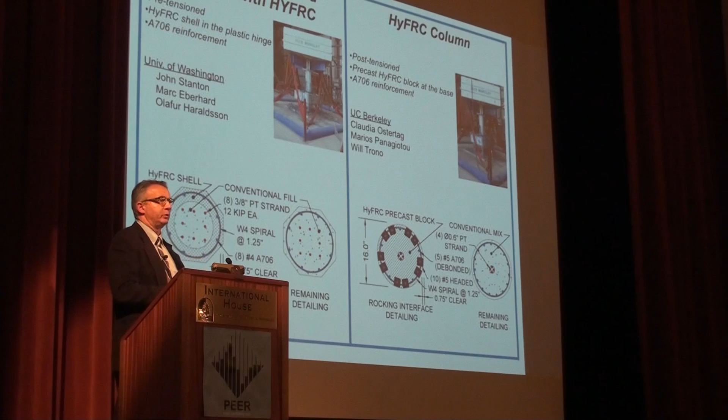There was a system out of San Diego, Jose Restrepo and his colleagues. They did initial work funded by FHWA, but followed up with a system funded by PEER, that had a tube inside a tube, which comes in quite quickly, and then is grouted at the bottom interface, creating almost a rocking behavior at the bottom.

And then finally, because we were doing these 3 new systems and the reference column, it gave us the opportunity to test the effect of a retrofit or repair, which is probably a better way to look at it, where Mr. Mosalam and his colleagues looked at the idea of putting fiber wrap on the column.

So if we start looking at the response, I have a video from San Diego, which works on this computer.

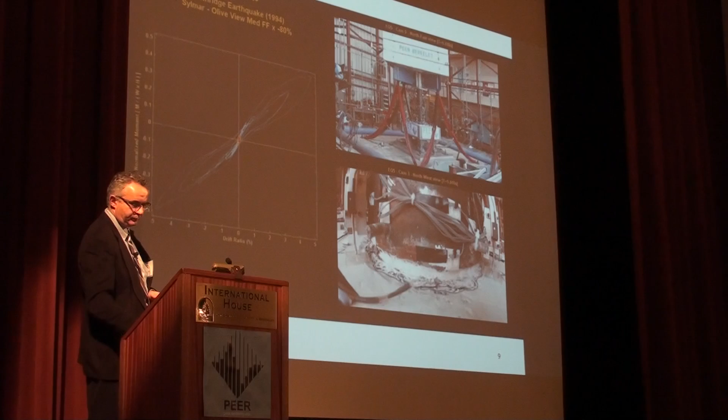This is actually a design level motion, but it's a second design level motion - it's already been subjected to one, and it's now going through its second earthquake at the same potential level. With all respect to Jose, it's kind of a boring video. Basically, at the design level, you have a joint opening and closing, and it's going back into place. There's not a whole lot of nonlinear behavior going on, so at the design level you're doing just fine. Frankly, all the systems tend to do just fine at design level.

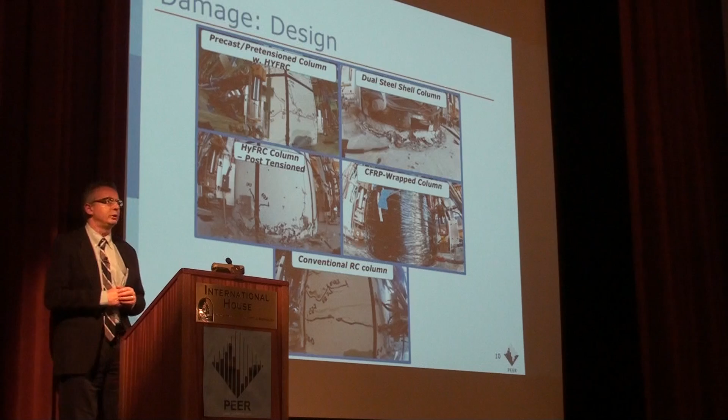This slide's too complicated to see from the back, but essentially it shows the 4 new systems on top, and a conventional column on the bottom, showing the damage at the end of the design level. You can look carefully and see how thick the markers were when we marked cracks right after the earthquake. At the design level, all 4 new systems work, but frankly the conventional reinforced concrete column does just fine as well. The cracks are a little open, but I don't think there's any question that bridge would be serviceable right after the earthquake.

As you go beyond design, increasing to about double design, you get more and more damage, and there you start seeing the problems and advantages of various systems. At the bottom of the pictures, there's actually bar buckling and bar fracture coming up. That conventional column - clearly you have problems with that bridge.

In the one at University of Washington, I'll fess up to the fact that our column didn't do all that great. We had HYFRC at the bottom, but we did ensure we had a hinge opening at the interface. Believe it or not, it opened up about 6-8 inches above the interface. Anyone who can explain to me why the moment of the cantilever is larger 8 inches up than at the bottom of the cantilever, please let me know. But once that crack had formed, it then rocked, and it rocked quite well, but it rocked about 8 inches above the top, so it didn't look very nice.

Both the dual shell and the hybrid fiber-reinforced concrete column did better in the sense of concentrating deformation. Most of the deformation, most of the problems, occurred right at that interface - either spalling the concrete in the HYFRC column, or spalling and messing up the grout in the San Diego column.

Residual displacements was another performance goal. In black I show all 5 systems, in red I show all 5 systems, what's going on during design. Frankly, none of the systems have a lot of inelastic action - all of them go pretty much back to where they started off. But if you go to that earthquake 7, the much larger earthquake, you can see differences among the systems start to appear.

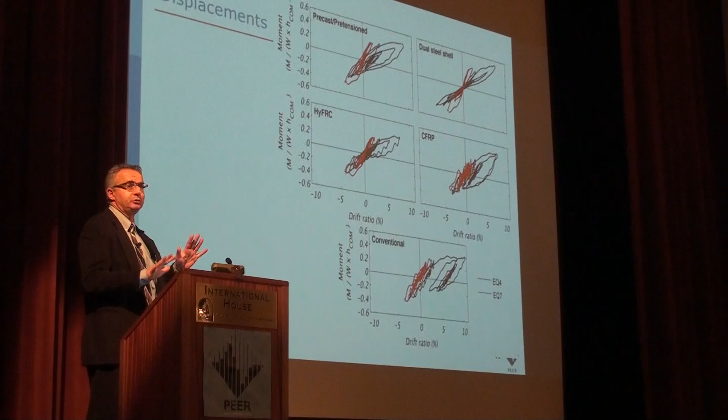So in residual displacements, you have kind of the same thing we had with damage: at the design level, things really aren't that different. But at higher design levels, things are quite different.

We've since gone to University of Washington, a new system. We decided we're definitely going to have that interface be the rocking interface. So we've armored that cross-section in a precast column, but a precast column that has this boot or shell, this armor at the base, and we're darn sure it's going to rock right at the base, and it's going to rock on that steel shell. You can think of it as a boot, or a tiny concrete-filled tube, but it's a precast column with pretensioning in it to bring it back to its position.

Back in 2005, we had done some tests that had nothing to do with rapid construction, but they were tests of a reinforced concrete bridge at the University of Nevada, Reno. This is at twice the design level.

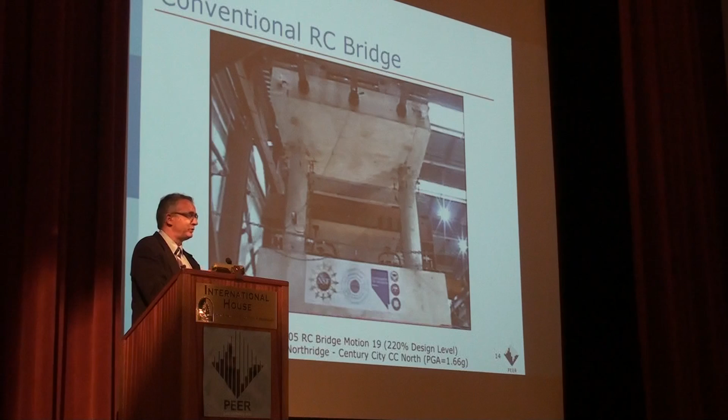This is at... really? Okay, this is not at twice the design level. This is a cool video too. You know what, it's late in the afternoon. So the bridge goes back and forth, concrete falls, people go, wow, that's a lot of damage. Okay, that's that video.

I wish I could juggle, but I don't know how to juggle, so I have to do comedy instead. Okay, this one, let's see if it works. Otherwise, I can give you the quick version.

Now, there are a lot of systems that have been developed outside this program. I want to go through them relatively quickly and just give you a sense of what else is available out there. Professor Roeder, Lehman, and their colleagues at Washington, and a lot of other people, have worked on concrete-filled tubes. There, essentially, you bring a steel tube to the site, lay it flat, brace it, put grout to hold it in place, fill it up with concrete, grout a precast beam on top of it, and then you continue your bridge.

They looked a lot at the capacity. In the capacities, you can see on the upper figure that around 3 or 4% you start getting some buckling at the base—it still works fine. And around 7 or 8%, you start getting some ripping and tearing of the tube. But that's just the capacity side.

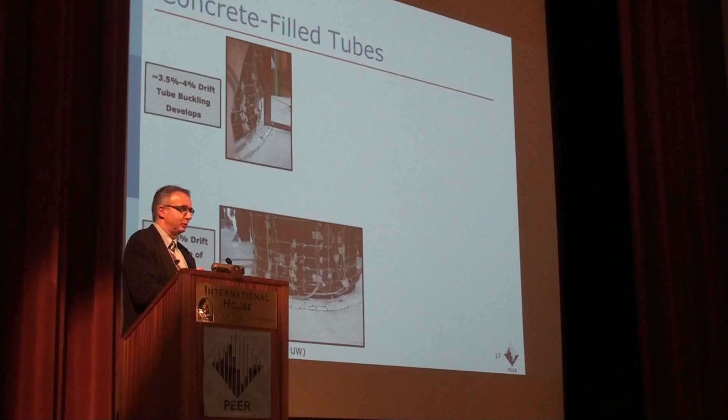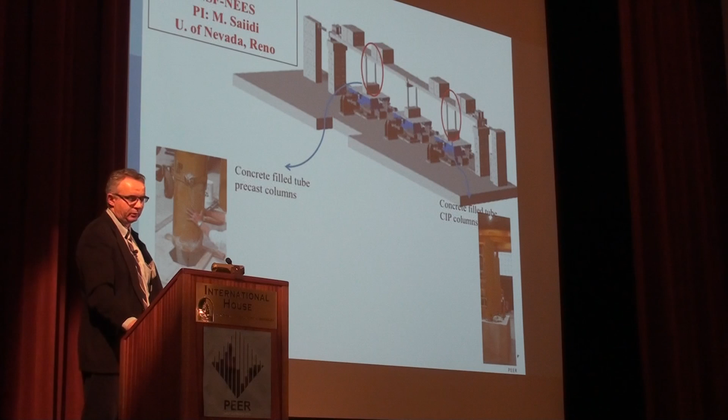These are 3 projects led by Mehdi Saiidi, though I know he has collaborators on all these. This one is a bridge that has 3 different systems in it. It has concrete-filled tubes, both precast on one side and also cast-in-place on the other end. In the middle, there are some segmental segments that have CFRP wrapped around them. And then at the top, 2 of the bents also have pipe pins. All of these are kind of methods to increase the performance.